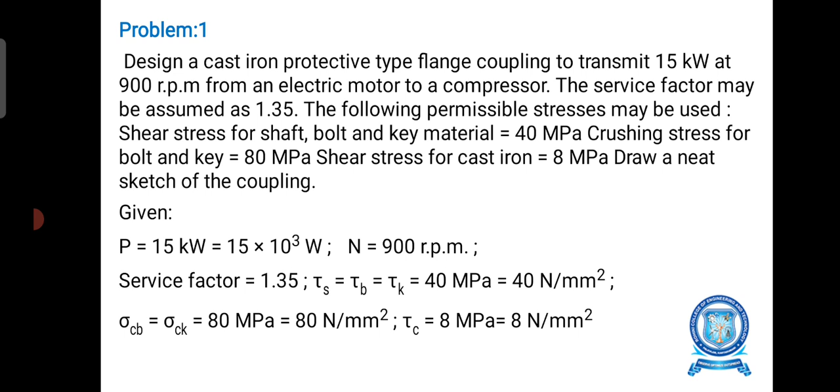Design for hub. Find the diameter of the shaft. We know the torque transmitted by the shaft T equal to P into 60 divided by 2 pi n. P we know 15 into 10 to the power 3, and n is given in our problem, 900. After substituting these values, we can get torque T equal to 159.13 Newton meter. We can convert into Newton millimeter: 159.13 into 10 to the power 3.

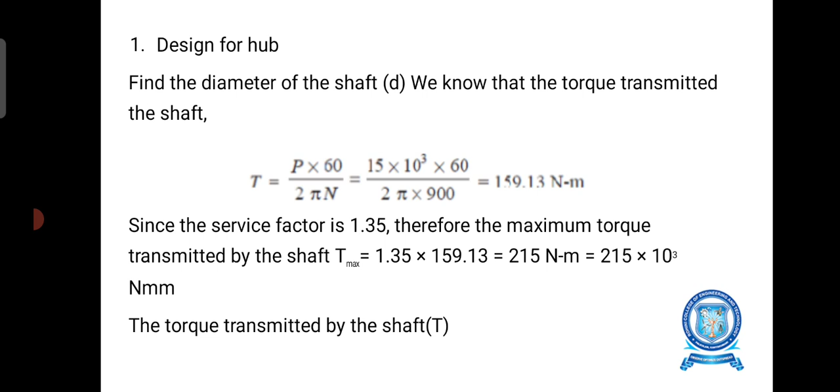Since the service factor is 1.35, the maximum torque transmitted by the shaft T max equal to 1.35 into 159.13, that means 215 Newton meter, or 215 into 10 to the power 3 Newton millimeter. The torque transmitted by the shaft, 215, equals pi by 16 into tau s into d cube. If we substitute all values in this formula, we can get d equal to 30.1. So say d equal to 35 millimeter.

We know that outer diameter of the hub capital D equal to 2d. d value we know 35. After substituting, capital D equal to 70 millimeter. And also we can find length of hub L equal to 1.5 d, 1.5 into 35 equal to 52.5 millimeter.

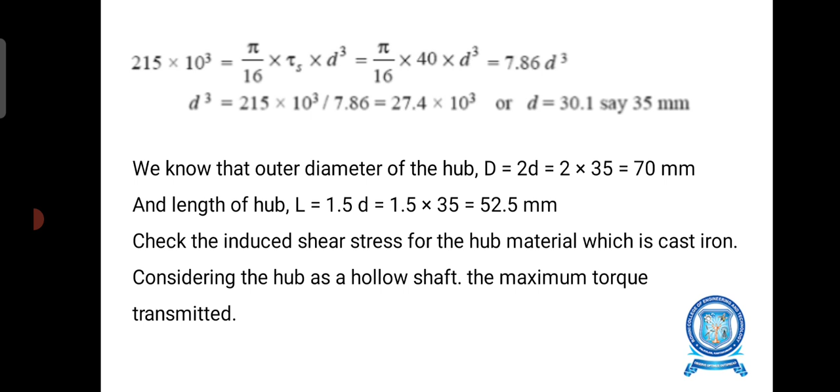Check the induced shear stress for the hub material, which is cast iron. Considering the hub as a hollow shaft, the maximum torque transmitted T equal to pi by 16 into tau c into capital D power 4 minus small d power 4 divided by D. T we know 215 into 10 to the power 3, capital D equal to 70, small d equal to 35. Substituting all values we can get tau c equal to 215 into 10 to the power 3 divided by 63,147, that means 3.4 Newton per millimeter square, or 3.4 megapascal. Since the induced shear stress for the hub material is less than the permissible value of 8 megapascal, the design of hub is safe.

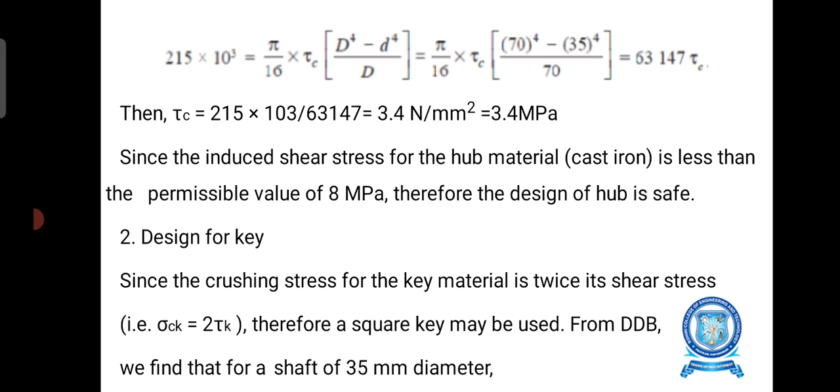Design for key. Since the crushing stress for the key material is twice its shear stress, a square key may be used. From design data book we can find that for a shaft of 35 millimeter diameter, width of key w equal to 12 millimeter and thickness of key small t equal to 12 millimeter. The length of key is taken as equal to length of hub, that means L equal to 52.5 millimeter.

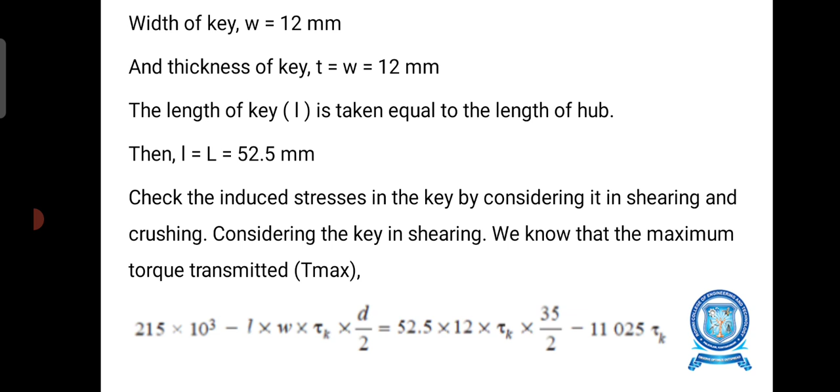Check the induced stress in the key by considering it in shearing and crushing. Considering the key in shearing, the maximum torque transmitted T max equal to L into w into tau k into d by 2. We know T is 215 into 10 to the power 3, L 52.5, w 12, small d 35. After substituting all values we can get tau k equal to 19.5 Newton per millimeter square, that means 19.5 megapascal.

And considering the key in crushing, the maximum torque transmitted T max equal to 215 into 10 to the power 3 equal to L into t by 2 into sigma ck into d by 2. T max 215 into 10 to the power 3, L equal to 52.5, t equal to 12, small d equal to 35. Finally we can get sigma ck 39 Newton per millimeter square, that means 39 megapascal. Since the induced shear and crushing stress in the key are less than the permissible stresses, the design of key is safe.

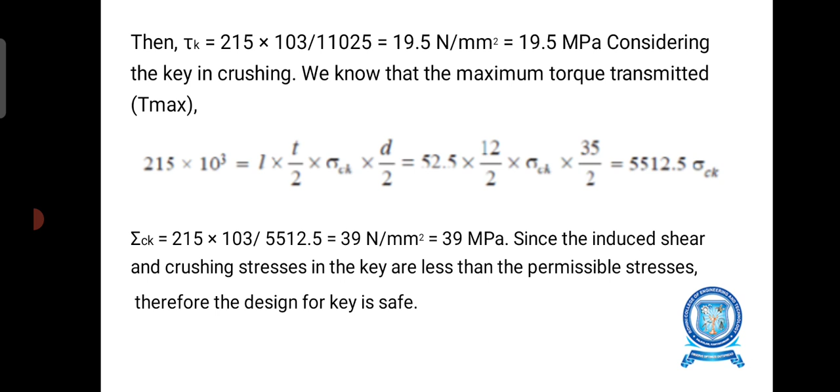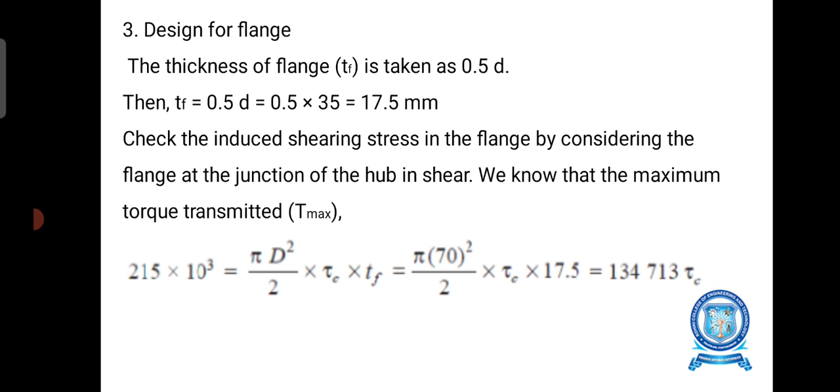Design for flange. The thickness of flange is taken as 0.5 d. So tf equal to 0.5 into 35, so we get 17.5 millimeter. Check the induced shearing stress in the flange by considering the flange at the junction of the hub in shear. The maximum torque transmitted T max equal to pi D square divided by 2 into tau c into tf. T max 215 into 10 to the power 3, capital D 70, tf 17.5. Simplifying, we get tau c equal to 1.6 Newton per millimeter square, that means 1.6 megapascal. Since the induced shear stress in the flange is less than 8 megapascal, the design of flange is safe.

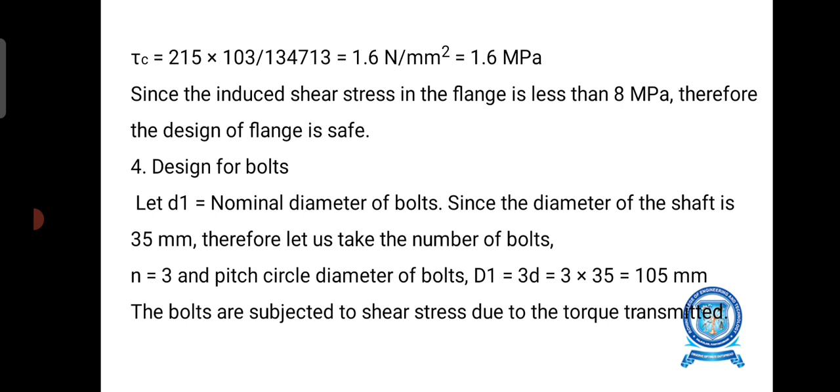Design for bolt. Let small d1 equal nominal diameter of bolt. Since the diameter of the shaft is 35 millimeter, let us take the number of bolts n equal to 3 and pitch circle diameter of bolt D1 equal to 3d, that means 3 into 35, we get 105 millimeter. The bolts are subjected to shear stress due to the torque transmitted: 215 into 10 to the power 3 equal to pi by 4 d1 square tau b into n into D1 divided by 2, with tau b 40, n 3 and D1 105. Finally we get d1 6.6 millimeter. Assuming coarse thread, the nearest standard bolt is M8.

Other proportions of the flange are taken as follows. Outer diameter of the flange D2 equal to 4d, that means 4 into 35, so we get D2 equal to 140 millimeter. Thickness of the protective circumferential flange tp equal to 0.25 d. If we substitute d value 35, we get 8.75, say 10 millimeter.